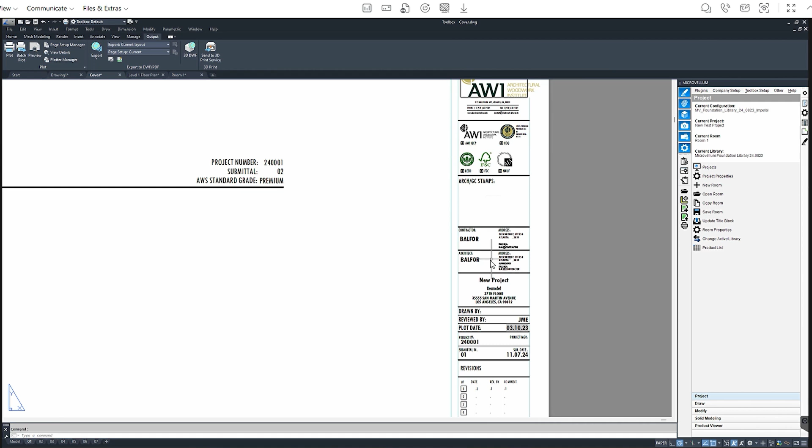as streamlined as possible. Today, I'm going to walk you through the process of how you can go to our online store. You can purchase and download this template, and then we'll walk through how you can set it up and then how you use it, how it will streamline your processes and your workflows in drafting. That's why we created the DuckWorks Microvellum CAD template. Our template is designed to make your drafting faster and more accurate.

So our template you can find on our website easily for download. If you go to our website, which is duckworksmw.com, there is a store link, which you will find right here is the product. Once you've purchased and downloaded, you will get a zip file and instructions. And I'm going to walk you through everything that comes in the download, what the instructions are, and then we'll go through the whole setup process together.

So here what you can see is what you will expect once you get the download. This will come in your email, you'll get a link to download and unzip, and inside that file will be everything that you see here on my screen. In that you've got your README, your installation and setup instructions, which is in PDF format, and it includes a full tutorial of exactly what I'm going to walk you through, but in written form with images. And you can see what that looks like here, which we will go through together.

Additionally, in the download, you will have all of the files needed for all 6 sheet sizes that we provide: 8.5 by 11, 18 by 12, 18 by 24, 24 by 36, 11 by 17, and 9 by 12. So we've built this to work for all sheet sizes that are common in millwork shop drawings, and you can use one or all of them. We're going to start today using and practicing setting up the 24 by 36 sheet size.

Inside that folder for each sheet size, you will find the various files that you need to set up that template. So there's actually in each sheet size 3 template files. These are the DWT file types. We have the cover template, the key plan template, and the room template. We'll go into this a little bit later, but this supports the structure that we recommend setting up your projects and organizing your files for all your Microvellum projects. That's going to set you up for success, the fastest speed of use of the software, and the best organization for teams to work.

Additionally, you'll have included here a millwork.ctb file. So this is your plot styles that gives you your line weights assigned by color. That can be customized and you can make multiple others, but this is pre-set up with line weights that are already mapped to the colors in the template that we've provided. There's a logo file, which right now is the DuckWorks logo that you will use to replace with your logo.

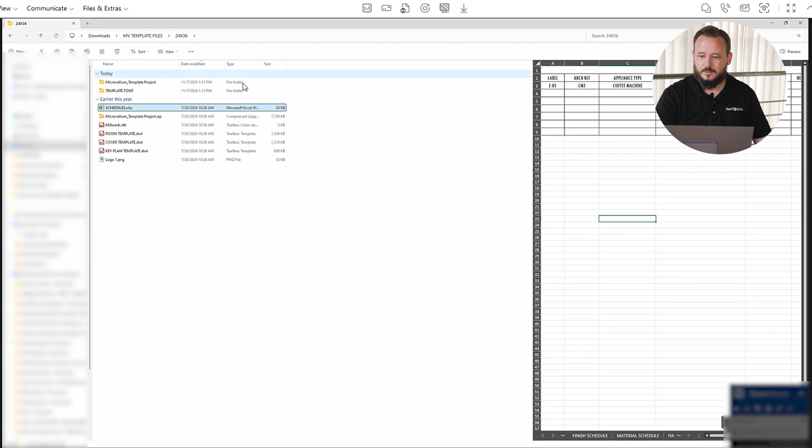Additionally, there's an Excel file, which has all the schedules that can be linked to your cover sheets or plumbing schedules, indexes, and so on and so forth. And we'll go through this as well. And then there's font files and a Microvellum import file. So now let's start with the instructions and we will walk you through how to set this up for the first time in your configuration with Microvellum.

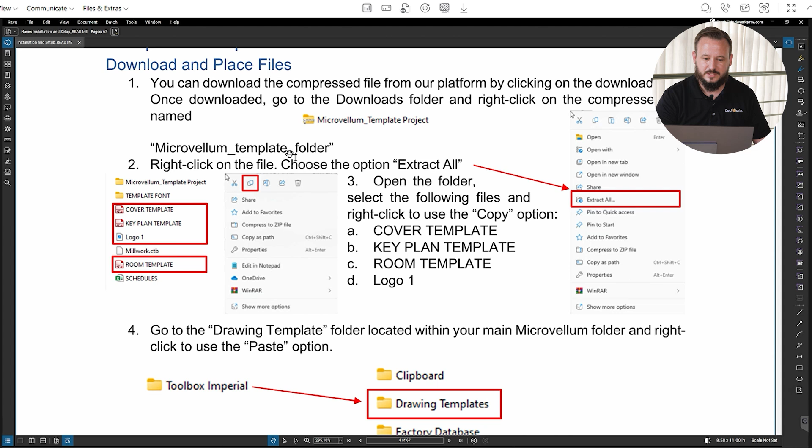So I'm going to show you how you would follow these instructions that we've provided in the PDF instructions. We just went through downloading and placing the files. Once you've downloaded them, the first thing you're going to want to do is extract. And what we're going to do is follow this step 3. We're going to copy these 4 files here that are outlined: the room template, the logo, the key plan template, and the cover template.

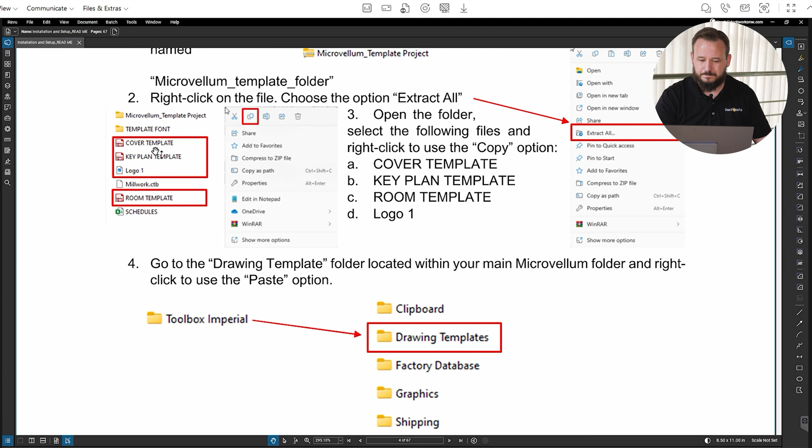And then what we're going to do is we're going to map to our drawing templates folder to paste them. So if I go back to my files, we want to copy each of our 3 templates and the logo file. And then if you go into Microvellum and browse to factory data, we can go to drawing templates. We're going to paste our files here.

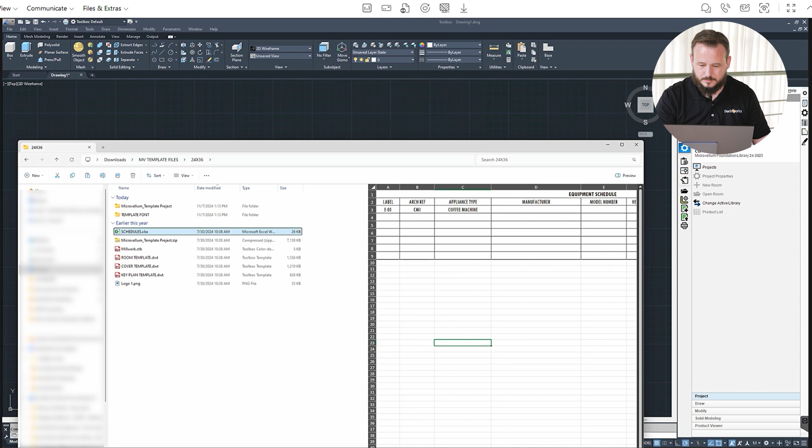Going back to our instructions. This is what it just showed you. The Excel file that is labeled schedules is going to be saved into every new project that you create. So for now, I'm going to copy this as well and put it in the same place.

Okay, now we want to move our CTB file to our plot styles folder. So we need to first locate where our plot style folder is. And we can do this by clicking on the plotter manager button in the output tab of AutoCAD. And then we can go to plot styles from there.

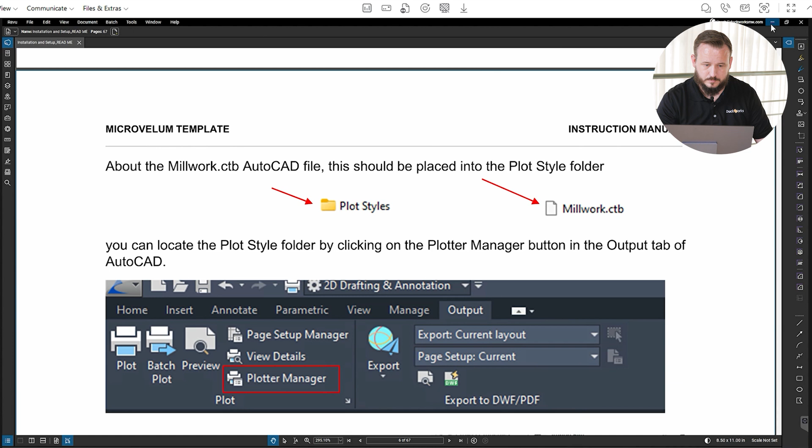Okay. We're going to go and copy the CTB file and paste it in this new folder. So going back to our instructions to the next step.

Now we need to import the template project into Microvellum, and this is what's going to give us our properties to populate title block. So in Microvellum Toolbox palette, we're going to go to Toolbox Setup and Options, and then open the configuration editor window. And under Utilities, we're going to go to Database Management.

Now that we're here, we're going to come down to Import, and we're going to go find our file. We're going to select the Microvellum export.stf and open. And all we want to do is import this template project. We're going to click transfer and import is complete. We're going back to our instructions.

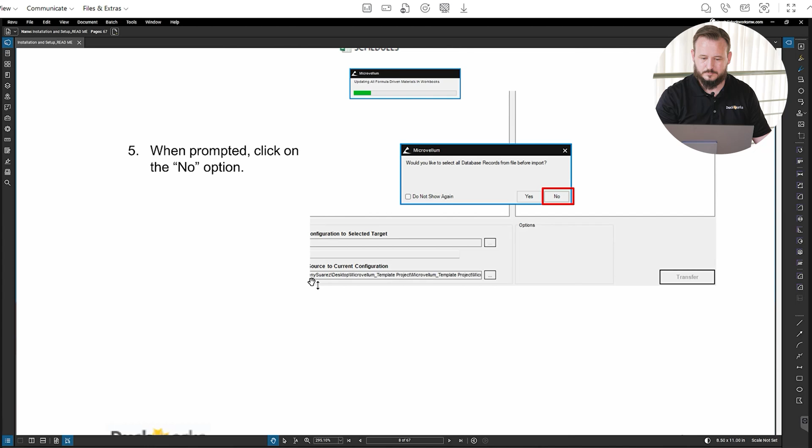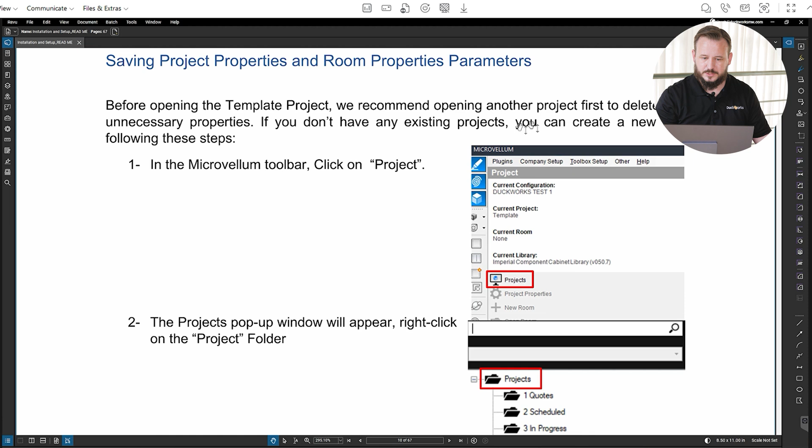And before opening the template project, we recommend opening another project first. Okay. So we're going to create our first new project.

Actually, we want to go and open this project that was imported. We're going to open the template project that we just imported, and then we're going to go to our project properties. And we're going to go to these user-defined project properties. And this is where we're going to first save these to be template properties.

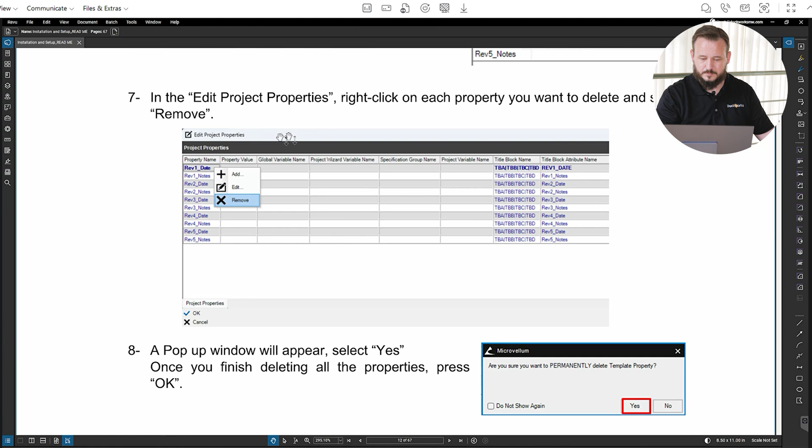We're going to first show template properties, and we're going to delete all these. Yours may look different depending on what's already set up in your template, but we're going to remove any that we don't need, and these are all from the out-of-the-box library that we don't want. This process that we're going through is just a one-time process that we should never have to do again. Now that we've done that,

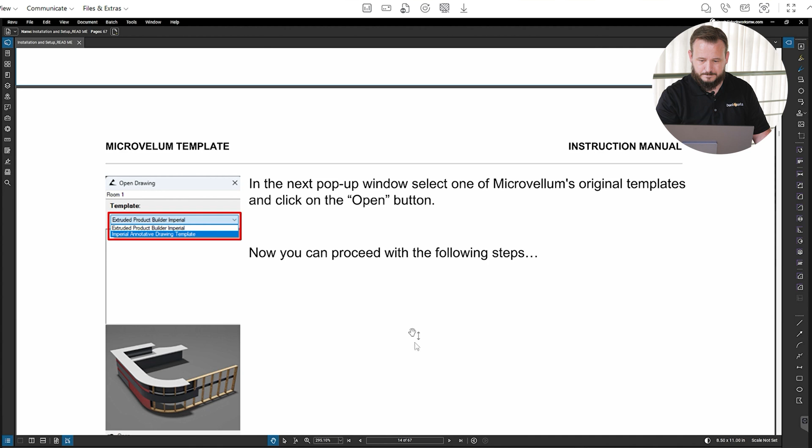we want to repeat the process for the room properties. So here we can go to room properties now that we have our room open. I'm going to go to show template properties, and I'm going to delete all of those from the template. Okay. So now I should be able to

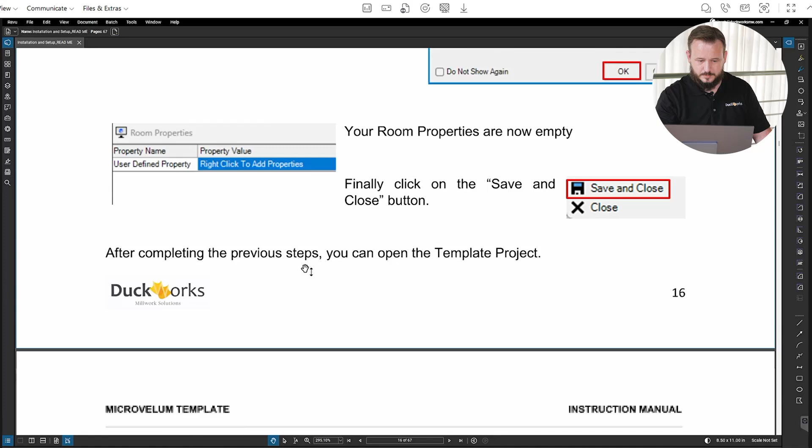So now we're going to go back to the user-defined project properties, and what we want to do is we want to save all of these. We're in the template project that we imported, and here's all of the template properties that we now want to have in every project that you create new in Microvellum. And to save these back, we click on each one, and we can right-click Make Template Property. And this, unfortunately, is a one-by-one process. But again, you will only have to do this one time, and then they will always be there.

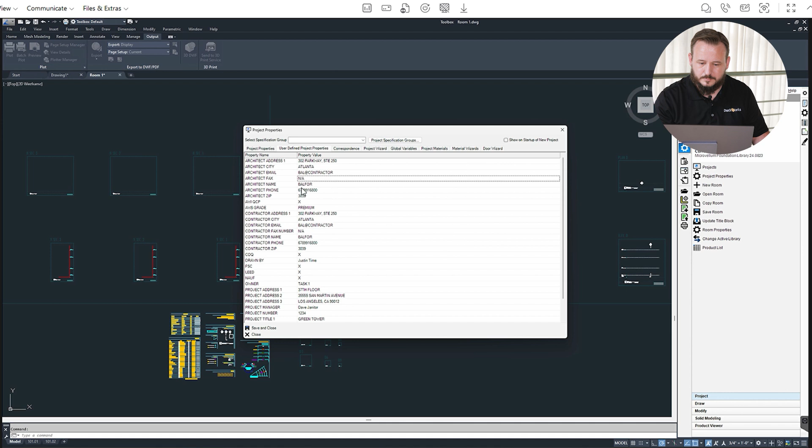When editing, you can skip to the end of what we're about to do.

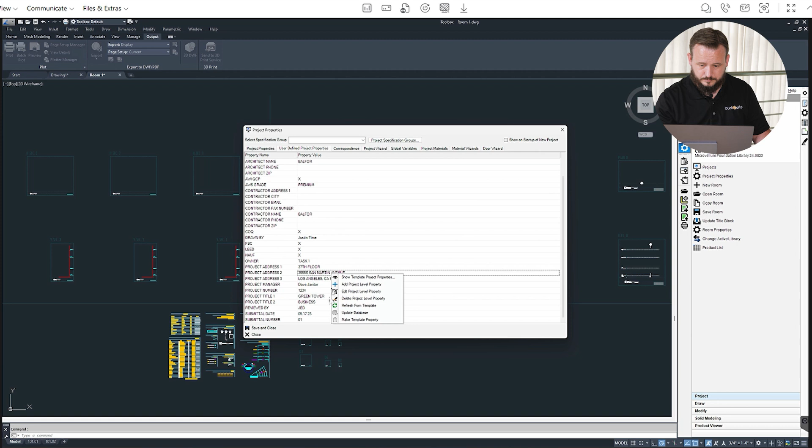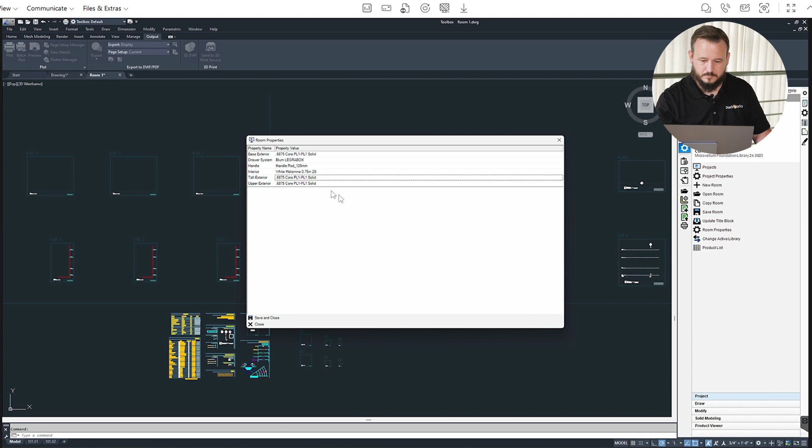Once you get those all saved, we can double check and show template project properties. And again, we should see all of the project properties that we just made template properties. Now we're going to go back to room properties, and we're going to repeat the process here. We're going to save each one a template property. We can check the same way as show the template, make sure they're all there.

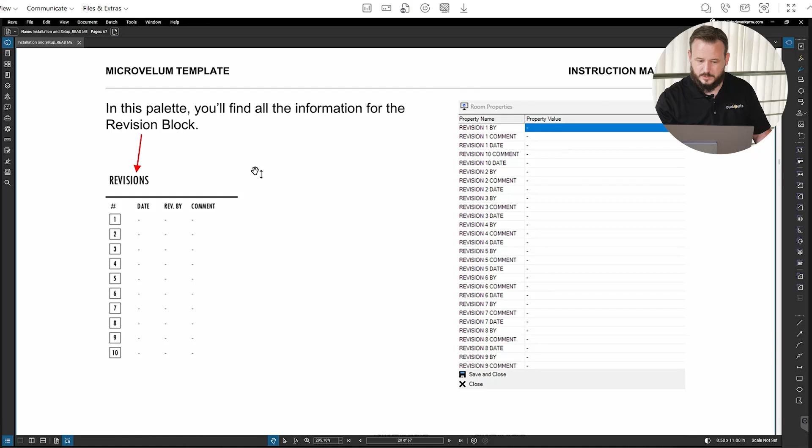Okay, we're opening the cover, and we're gonna save these room properties in the same process.

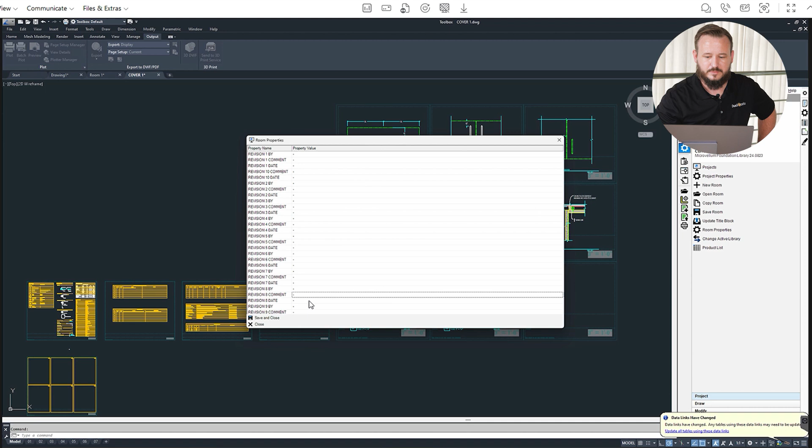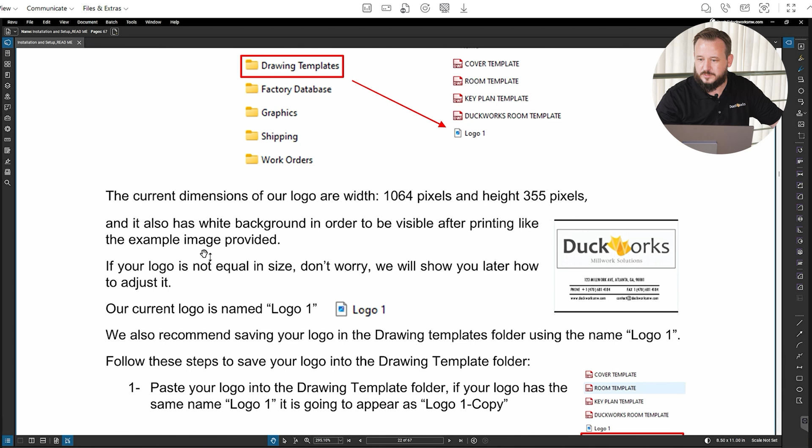We've provided a logo as well with this. In order to change this, you'll need to go into the drawing templates folder, which is where we pasted this logo file earlier as well, and we'll simply need to change this with your desired logo. I'm going to replicate this process and change our logo that comes with the template, and show you how to change it. I'm going to use the AWI logo as the example.

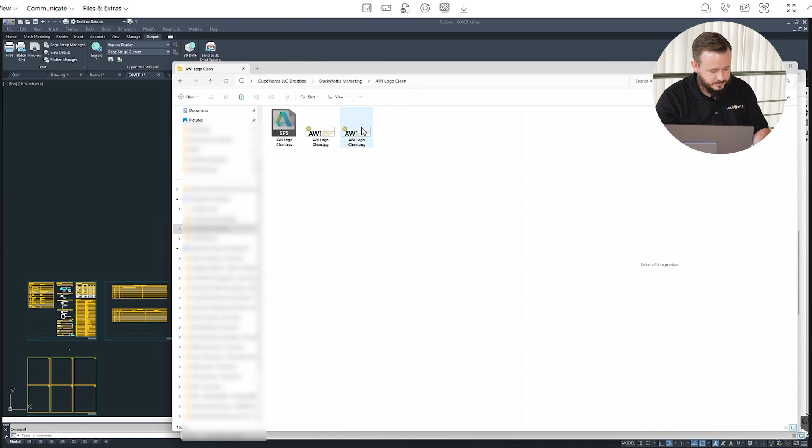So here we have the AWI logo. Just close. We just need to rename the new logo to the same name. It should get opened in our template. We can check this by opening that same file again. If we go to Paperspace, you'll see that logo has changed.

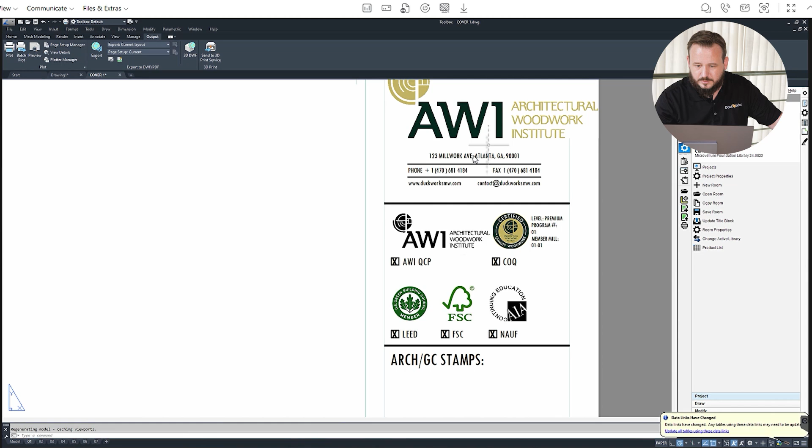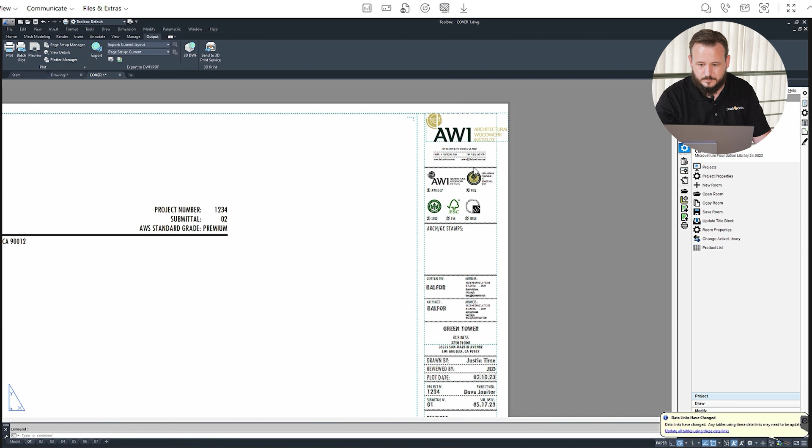Now you'll likely need to adjust the dimensions, which you can easily do. There's also instructions about how to resize that logo in our instructions that you'll get with the download.

So now we can change the company information in your title block, which again, we have outlined in instructions. You will go through those instructions and edit the block, and you can change from our DuckWorks Millwork Solutions to your information for your company. You'll do this one time and then save this back for new projects.

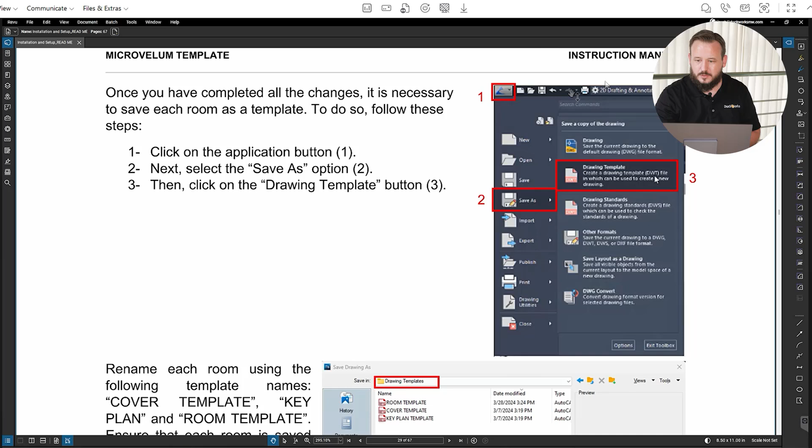So that is the process of setting up the new template, and now you should be ready to create a new project. So now let's walk through what setting up a project looks like, now that this is all there and using it for the first time. I'm going to add a new project like you're used to. And I'm going to add a new room, and let's start with our cover.

We add a new room. We call this my cover. And here's where I get to see my new templates. So in this list, because of where we pasted them before, you'll see the new templates. So here I'm going to pick my cover template and then open.

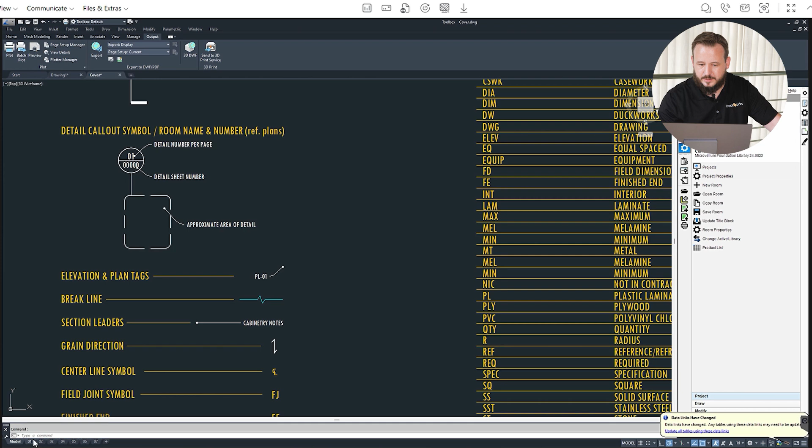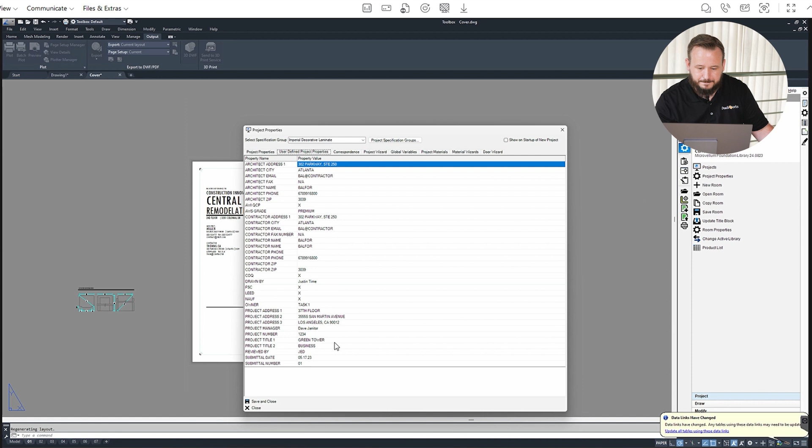And then I am immediately going to go to my project properties, where we can go to these user properties. You can see all the properties that we added to your template now. This will come in every new project automatically by default. What this allows us to do is change any of these fields to update the project information going forward. So I can change my project number to whatever yours might be.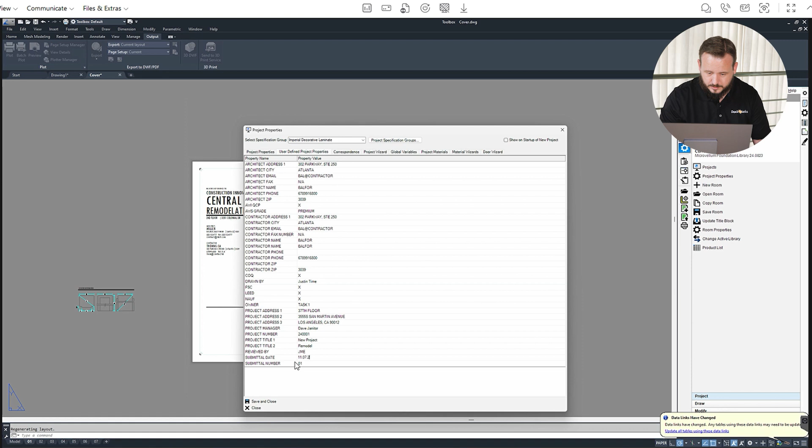You can change the project title. New project, remodel. I can put in my initials for the reviewer. I can change the submittal date, and so on and so forth. So when I do this and I click update title block, it's going to automatically update all of that information in your brand new title block.

So that is the first benefit of this new template and how easy it is to use for you going forward. You will have the ability to update all of this information in your project properties. And so now if I want to create a new room, let's make a floor plan. We can use our new key plan template. We're going to get the same option to pick what template I want to use. I'm going to use my key plan template.

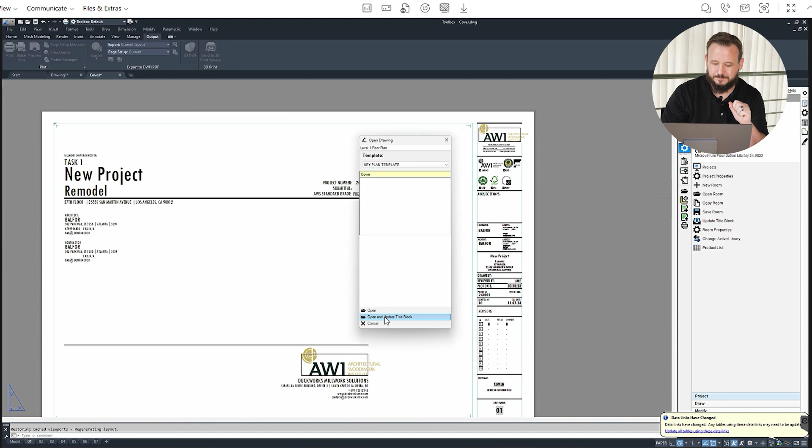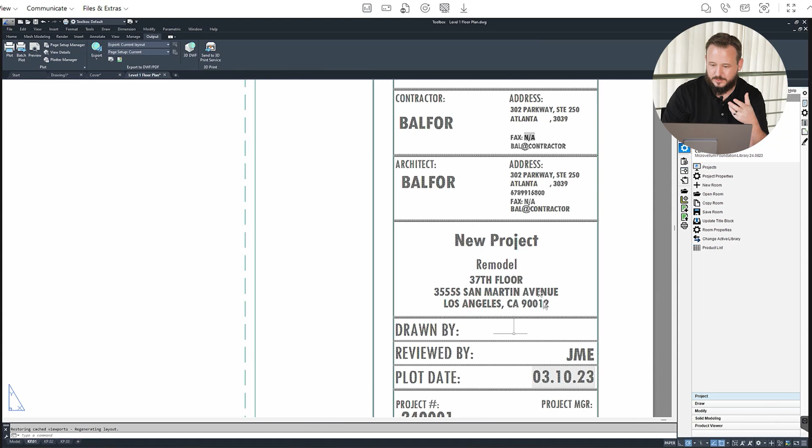I'm going to click this time open and update title block, because I've already put in my project information in the project properties. Now the title block here will be updated with the information that I have put in my project properties. I can then proceed in here to import, for example, if I get the CAD files from the architect or the GC, or if I'm drawing my plan, I can paste it here, and I will already have a layout set up where my ref plans can go.

Furthermore, I can go into my room properties, and I can put revision dates. So if I were to revise this again tomorrow, put my initials and a comment. Again, I can update title block, and that information goes into my revision block.

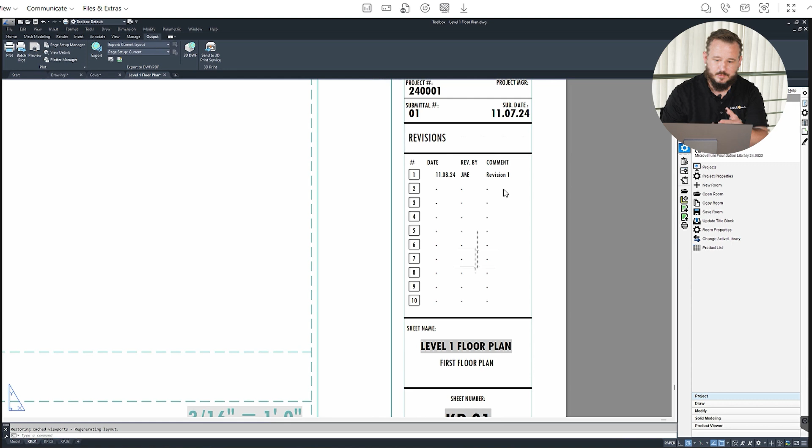Let's make one more room to show you how the room template works. We'll just leave it room 1. And I'm going to choose my room template. Again, open and update title block so I get my project information to populate.

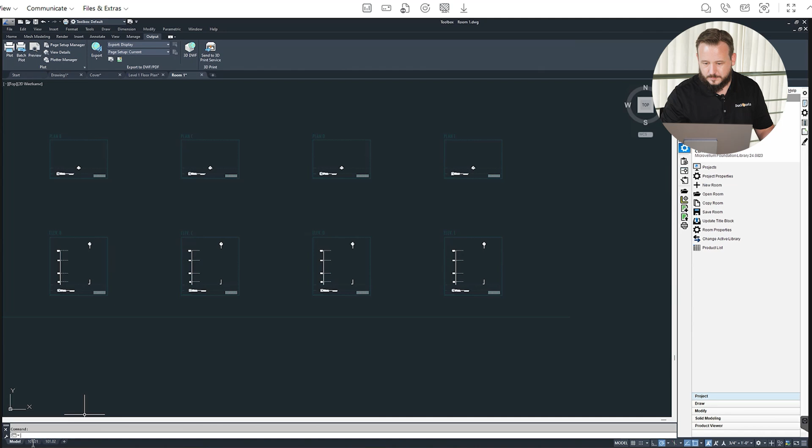And I'm already ready to go. I can go to room properties if I have revisions in any different room, and those properties are unique to that room. The room template comes pre-populated with layouts and viewports that are already pointed to your model space views for a plan, elevation, and sections.

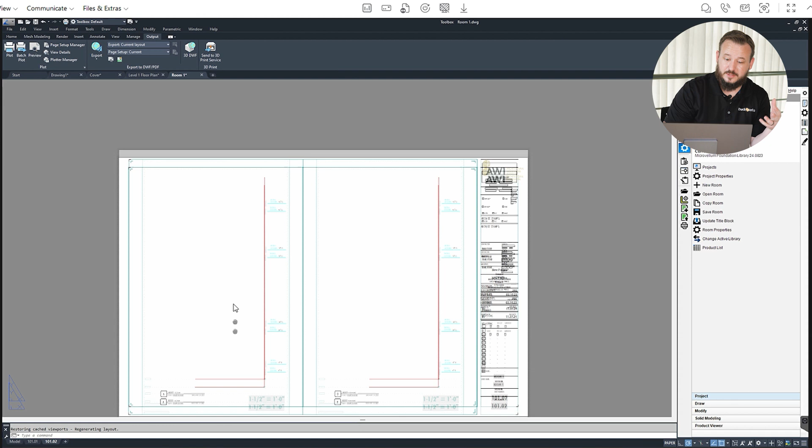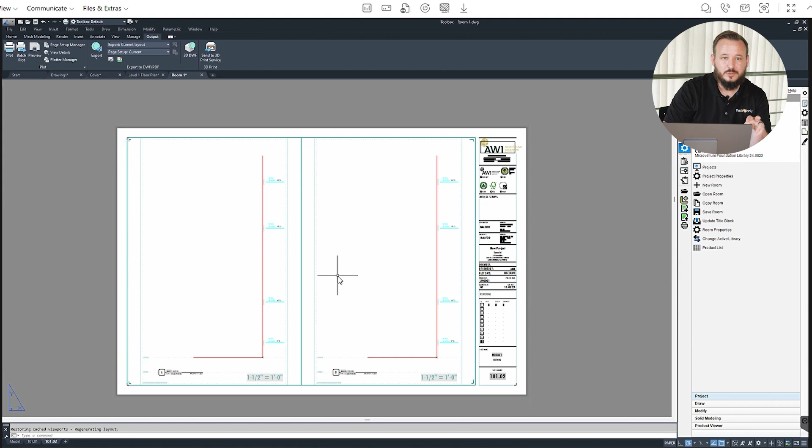We've set this template up, which is how we recommend working in Microvellum in your CAD templates, so that every room or area or scope has its own CAD file and its own room in Microvellum. This allows multiple people to work in the same project and allows you to keep the file sizes smaller and quicker to use. And it allows you to segment your work as you would release it. So if this room or this drawing would be a work order, I have everything that I need together in one drawing for publishing to the shop.

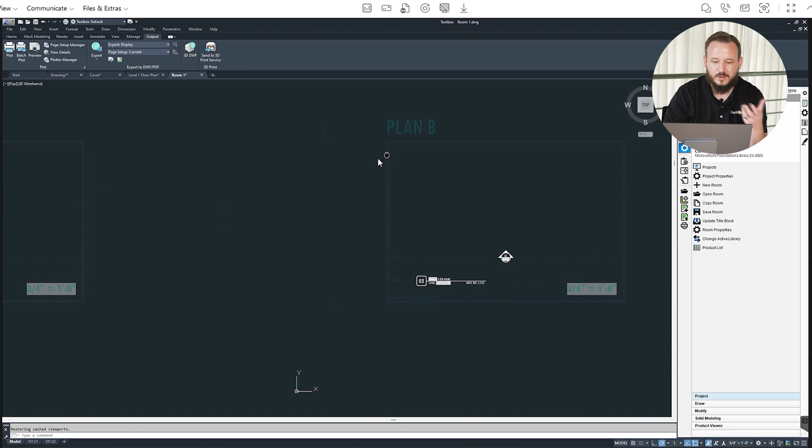The other thing I'll point out here is you see plan A, you see elevation A in the viewport. That makes it easy to find what I'm looking for in model space. If you've ever worked behind another engineer, another drafter, and not known how they put stuff in model space, it can be boggling how to find and trace back what the viewport is looking for in model space.

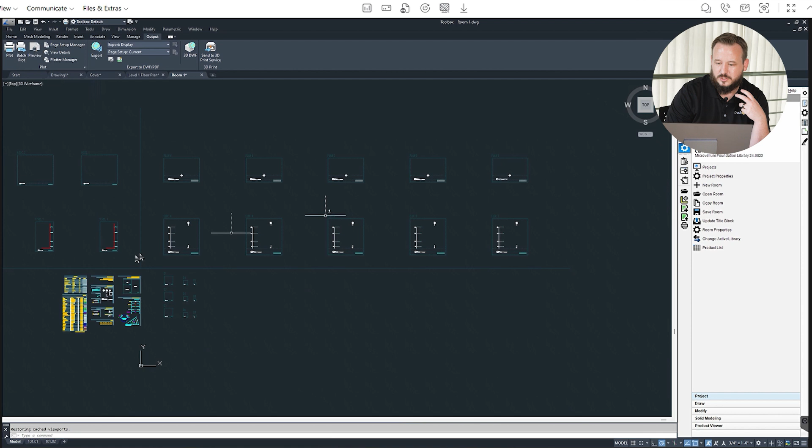So we've organized model space in a grid layout where across the top you've got plans and corresponding elevations. And then we've got sections off to the left. Everything is aligned, so you can use construction lines vertically from plan to elevation, horizontally from elevation to section, and you can easily navigate. Plan A is always in the same place, plan B, and you can renumber these views as you need, but this allows anybody from paper space to find what they're looking for in model space.

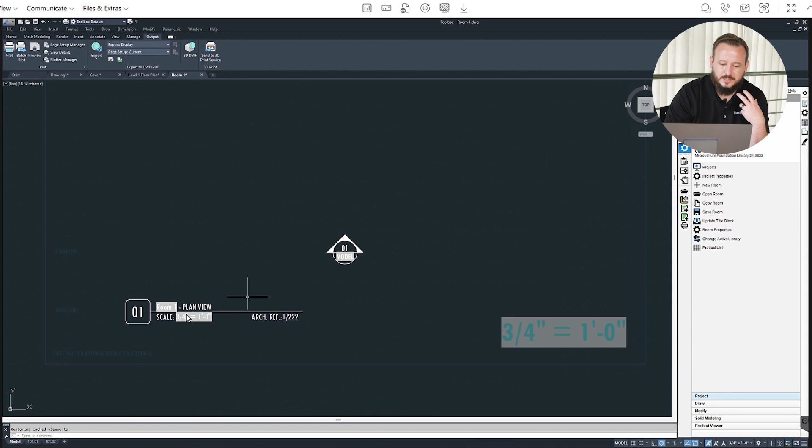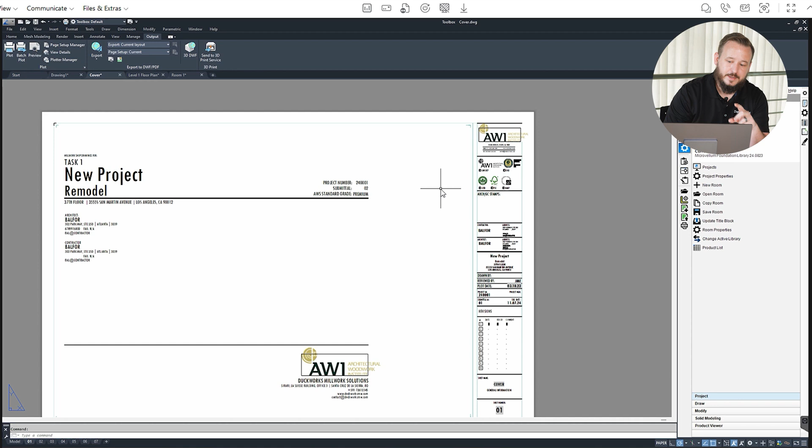It also comes pre-populated with blocks, everything you need from view labels and callouts to section tags, and even your elevation markers for in-wall blocking. I will remind everybody, I didn't point this out yet, but this is an AWI QCP compliant template. What that means is that what AWI QCP shop drawing standards call for, we have in our title block, from QCP information to the contractor and architect information to manufacturer information, and everything that you would need to be compliant with shop drawings. So you don't have to think, this is a QCP job, I need to change my standards.

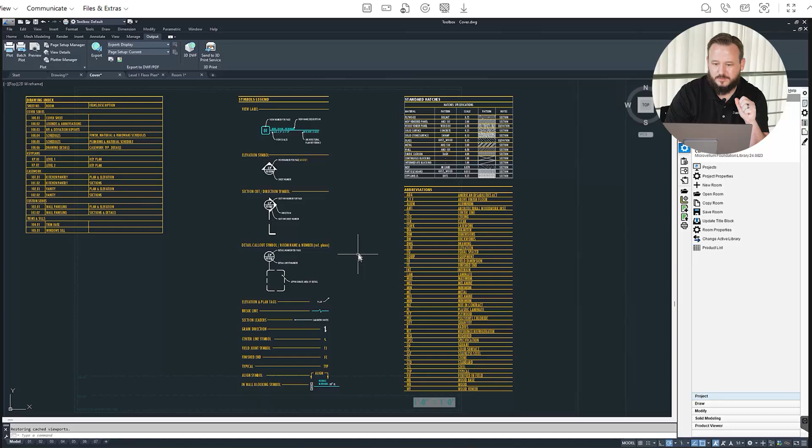All of this, as you'll notice, is set up with colors. And the last thing I'll point out is we do have legends over here that you can reference in model space. Quickly, your annotative dimensions: we have pre-set up a standard, a VIF for verify dimensions, which are set up with the plot style to automatically print red. We have FD, and we have equal and plus minus dimensions.

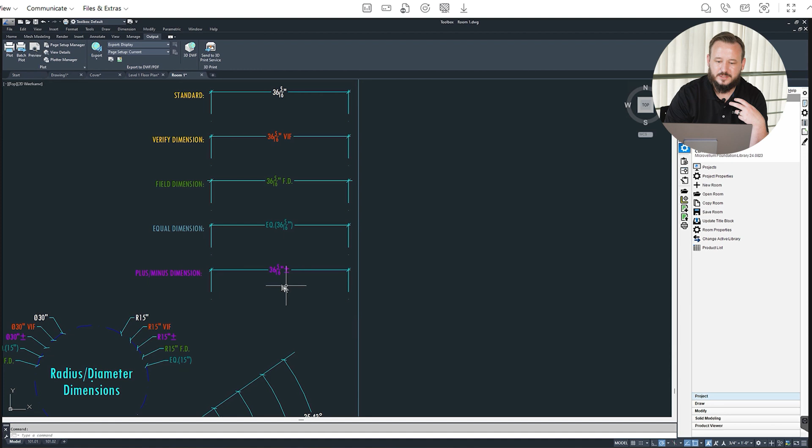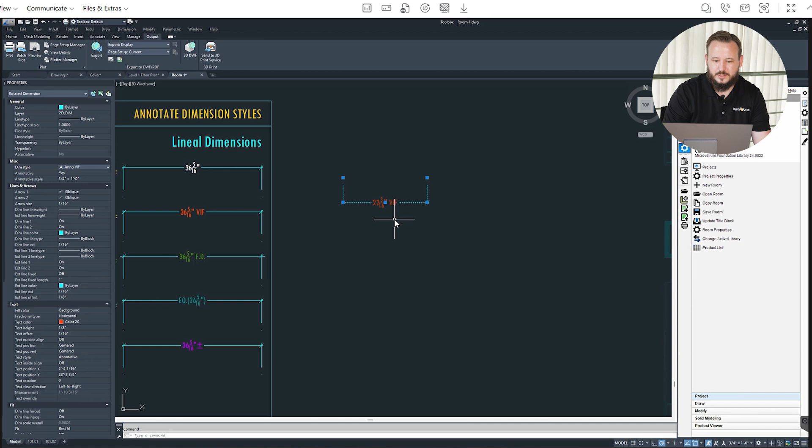So the idea here is that if I need to create a dimension in a pinch, and I want that to be a VIF dimension, I can very quickly just change that dim style to whichever thing I want it to say. No more adding text or overwriting or anything like that. And that color is set to print, which you can change in the plot style.

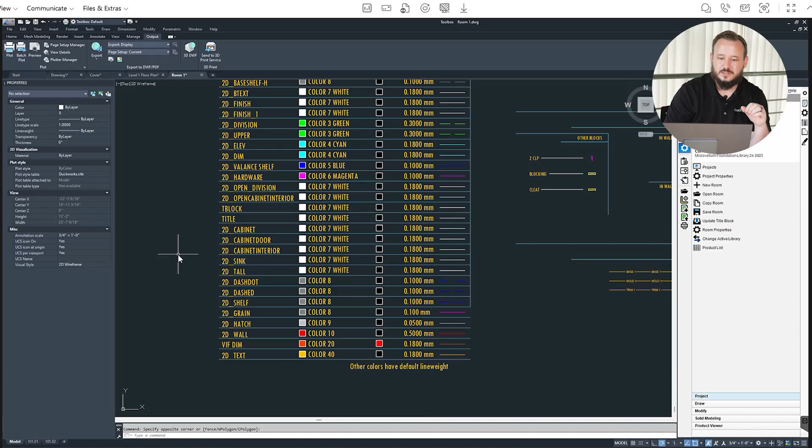The layers that we have here and the colors are all preset up here for easy reference. But we do have all the Microvellum layers preset up. The idea there is this template is built to work with Microvellum. If you don't have Microvellum's layers in your template, Microvellum products, when you put them in, will create them and they'll be set to your default properties, so white and default line weights. And that can be not ideal. So we have them preset up, and the colors are mapped here, with what they correspond to in line weights.

There's also hatches, so you can easily match properties and utilize any of these blocks and things in any drawing you have going forward. I hope this tutorial is very helpful for you. I think that you'll get a lot of value out of this.